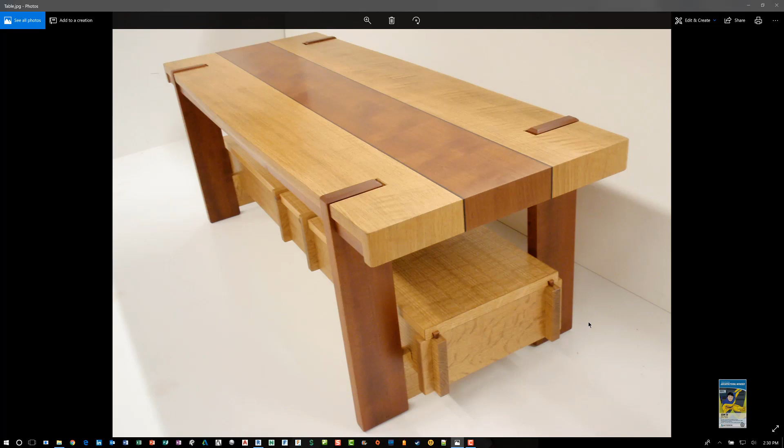Today's video is on how to create a dining table in Revit. I did a quick search on Google Images and found this table, and I thought it would be interesting to build this. This video is part of a series of videos that I'm creating on how to create Revit families. So let's go ahead and begin by creating this dining table.

Here I am in Revit 2018.2. I want to create a new family, so I'll click New over here. Choose Furniture, since it is a type of furniture, and you'll see the furniture.rft. Click Open, and the file will be created.

And when you work with this file, it'll give you two reference planes as a starting point. The two reference planes that you can see are called Center Left Right and Center Front and Back, and they both have Defines Origin checked, which means the insertion point of this table as it stands now is right here.

If we want to have the insertion point to be maybe, say, the lower left corner of the table, then we can adjust that accordingly.

As with all families, the first thing you want to do is take a look at the design of what you're working with and rationalize what you're about to build. For example, you have the top, you have the front, the back, the left, and the right. You need to create the skeleton framework that defines that tabletop. You also have four legs here that have a certain thickness and a certain depth and a certain height as well. So you need to create reference planes that define each one of those legs.

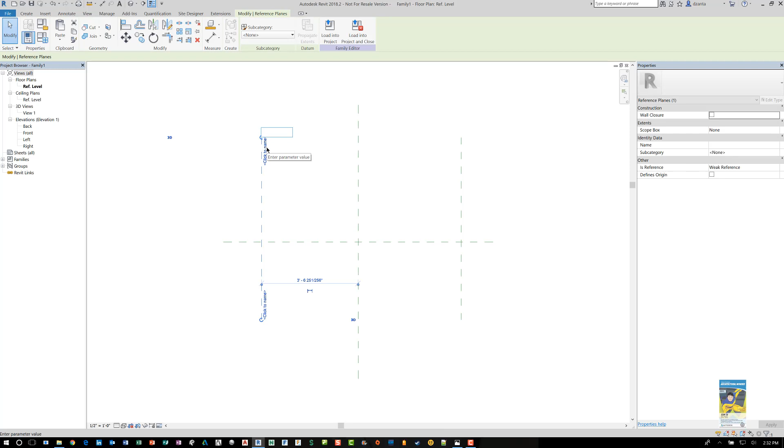I'll go here in Revit and I'll use the keyboard shortcut to create a reference plane. And I'll draw one on the left and I'll draw one on the right. When you're drawing the reference planes, try as much as you can to keep them aligned to each other and the start and end points to be the same so it looks cleaner for you. Don't forget to name your reference planes as well. So that's going to be the left side of the table. This will be the right side of the table.

Create a reference plane for the back. And create one for the front. And again, make sure that the reference planes line up nicely. This one will be the back. And this will be the front.

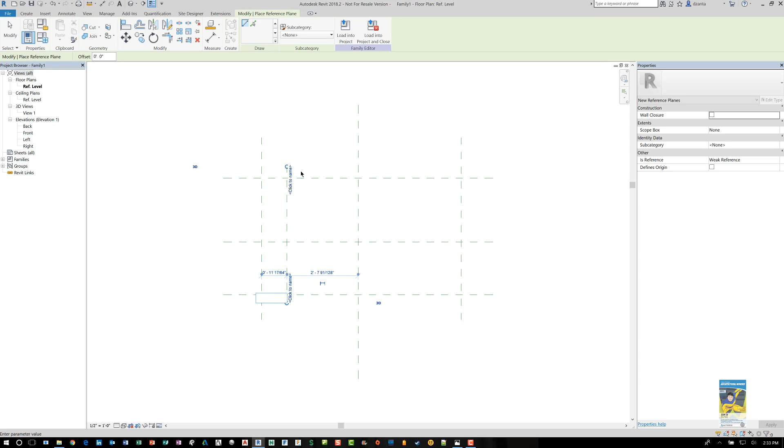We also want to create the reference planes for the legs in plan. So we need one roughly over here and roughly over here. And over here. And over here. We also need reference planes for the part of the leg that does this over here, and the one down here as well. And from the picture, it looks like the legs also come out past the end of the table, the edges of the table, like so. So let's make sure we create a reference plane for those as well.

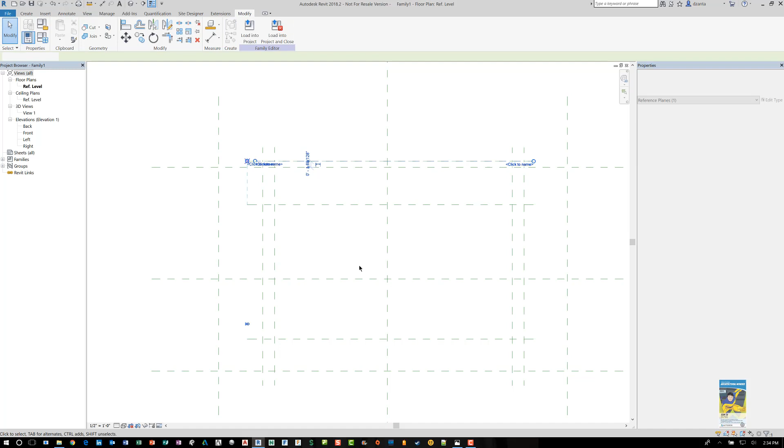Now, once that's done, we want to put some basic rules in place in this plan view. We'll create some dimensions that allow the table to grow equally on both ends. We'll define the length of the table and the width of the table, and the fact that it also grows equally from the center, since the center of the table is the center point.

And then I'm going to move this back over here a little bit. And we do know that we want to move these reference planes back a little bit. And for the legs, the extension that goes out past the edges is just a little bit. So I'll go ahead and place some dimensions for this side and this side. And let's set that to be an inch. And we'll hold that relationship, so we'll lock it. Same thing on this one.

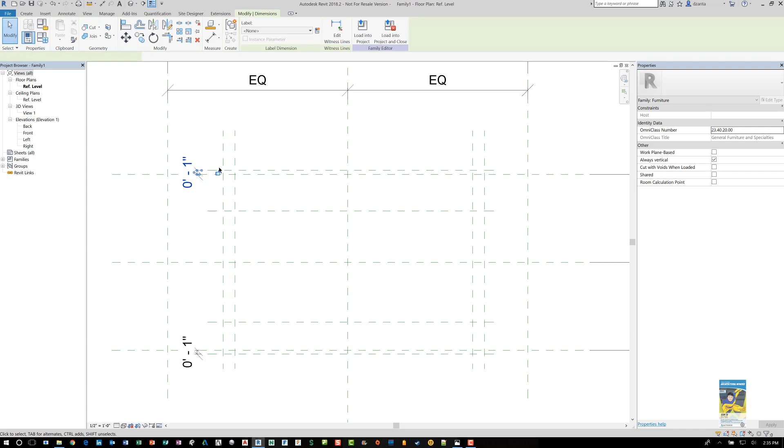Now as for the depth of the table leg, we can either parameterize that or make that a stable size. So let's, for the sake of ease, make it a stable size.

I'll put this over on this side, a little easier to see, and this one as well. Let's set it to be something logical, say 8 inches for now. And over here is 8 inches, so let's lock that relationship as well.

As for the thickness of the legs, they can be whatever thickness we want. Again, if we want to parameterize it, we can. Let's set that to 2 inches.

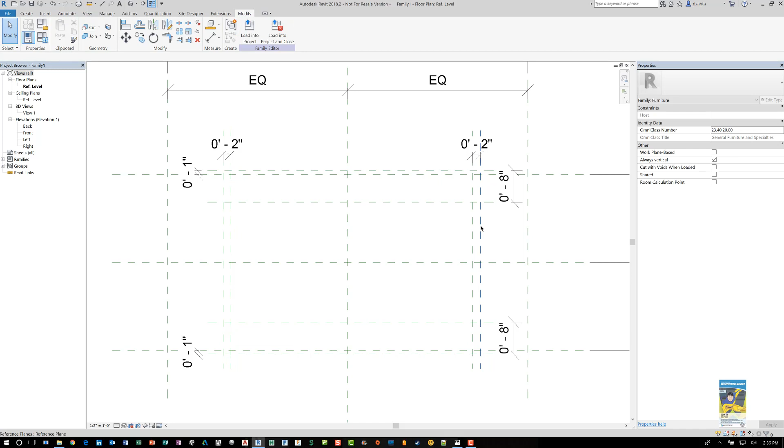Now, the location of the table legs from the outside edges also needs to be defined, because if you don't do that, as the table flexes, the legs won't stay in the same position. Right now it's set to a foot. I think that's fine, I'll lock that at a foot. I'll do the same thing on this one. Okay, so I'll lock that at a foot.

And we said we wanted the legs to be 2 inches, so 2 inches. Since we want to lock that 2 inch, that way it'll hold. Same thing over here, this needs to be locked as 2 inches. So when we draw the shape of the legs, here and here and here and here, it'll hold that size. So now let's go ahead and parameterize the table length.

And we'll do it as a type just for the sake of ease, and it's a family parameter, not a shared parameter. And the table width.

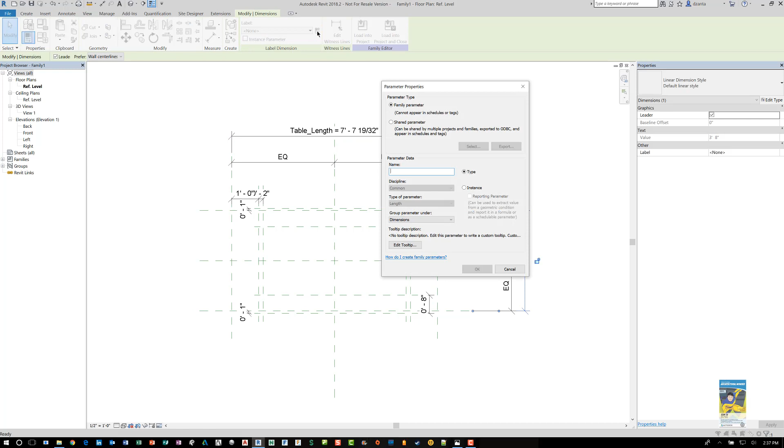Now let's head over to the front elevation, type in ZA for zoom all to fit, and take this level that they give us and pull it out of the way, because there is a reference plane at the bottom right there, and we'll call it bottom, and it's locked by default.

We need to create a reference plane that defines the tabletop. We also need to create reference planes that define the overall thickness of the table. And because there is some interesting void going on, I'll tackle that a little later.

So let's get the overall shape down. Now, we'll place a dimension for the total height of the table and parameterize that. And then create a dimension for the overall thickness.

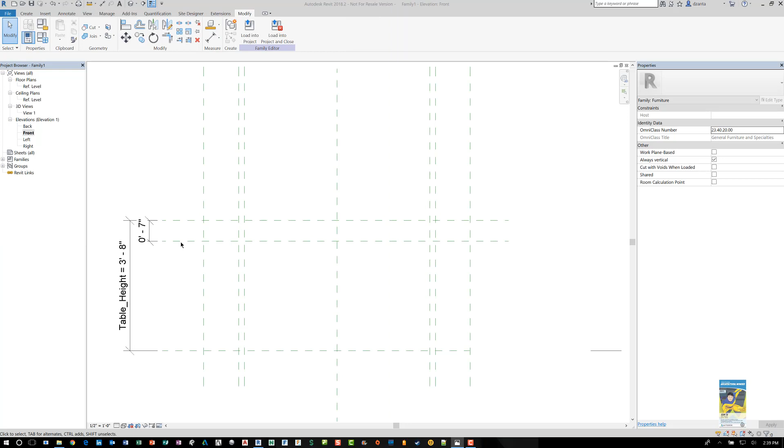As for the table length, we'll do a standard 8-foot table. And for the width, let's do a 4-foot table. Everything adjusts accordingly. Let's head back over to the plan view to make sure that it still looks okay.

You may need to change the scale as well so that all the text and dimensions are a little smaller, easier to work with. You may also need to left click and pull the reference planes so that they actually cross each other very nicely, to create the intersections you need so that you can actually create geometry.

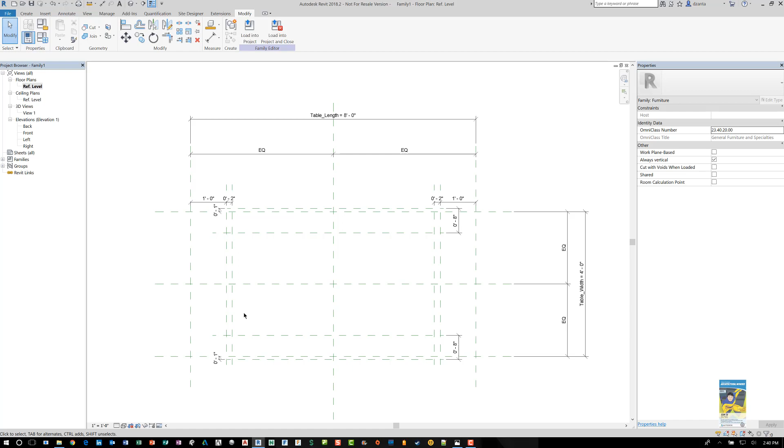So let's start by putting in some basic geometry. We know we have a tabletop. That tabletop goes from this intersection to this intersection as a rectangle.

So I'll head over to the extrusion command, use the rectangle shape, and unfortunately there's no lock feature here, which is what you see when you use a pick line method, where they have a lock feature. If they put that in the software, then when I use this rectangle command and click lock, all the lines I'm drawing will be locked by default to the reference planes I draw. Unfortunately, they don't have that feature with the rectangular shape command, so I have to manually lock them.

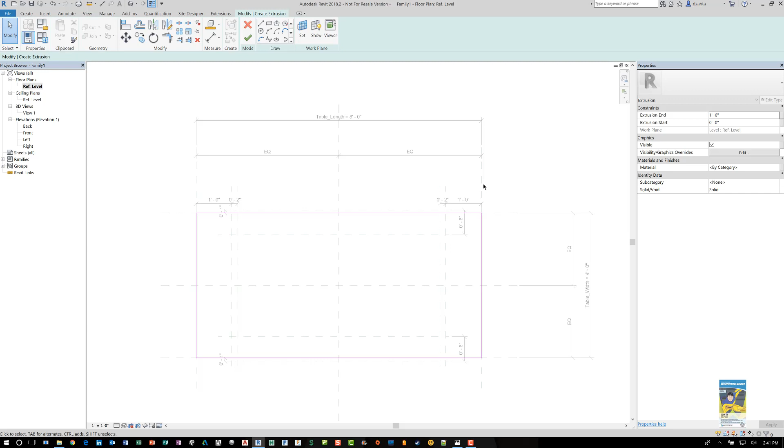Like this. So that edge of that magenta line is the edge of the table, and that aligns with that reference plane. Same here, here, and here. This is important because it's the relationship you need to build in order to tell the software that parametric dimensions control the location of these reference planes, which controls the plane of the geometry, which dictates the shape of the geometry.

We'll head over to the front elevation and finish the command, and you'll see the extrusion. I'll put it in shaded mode so you can see it, and we want to push and pull the top of the table to the plane that we need.

If you have to, you can also adjust your mouse sensitivity level if you have a good mouse, so it's easy to work with.

And so there's our tabletop. It's real basic right now. It's just a rectangular slab, and it looks like that.

table legs, there is some space just around the edges of the legs so that they go through. So let's go ahead and make some minor adjustments, and we'll create reference planes again. And this time I'm going to use the pick method, and I'm going to set it to what's a good size? Say 1/8 of an inch.

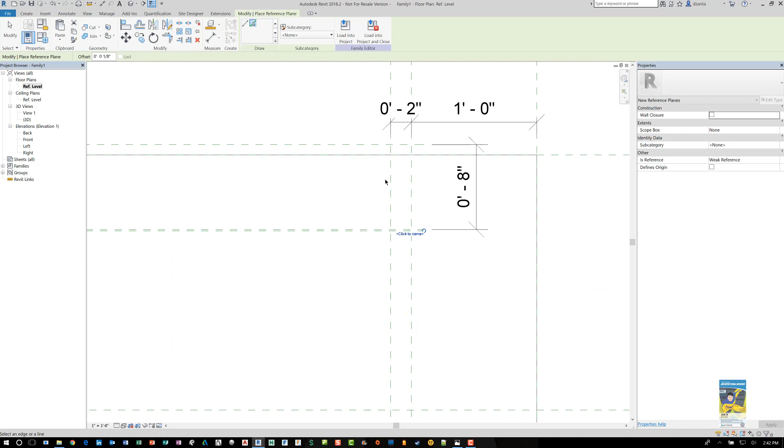Okay, so we'll create a reference plane on the outside of an 1/8, outside of an 1/8, outside of an 1/8, and then come over here and do the same thing. And then down here, same thing. So now you can see where you need to create the geometry.

So I'll head over to the Create tab again and do Extrusion again, Rectangle again, and I'll zoom in carefully. We want to pick this intersection here going to this intersection here. Whoops. So again, if you mess up, don't worry. You can use the Align command.

And that way it cleans up nicely. And to be sure, you can use the Align command to align and lock those faces as well.

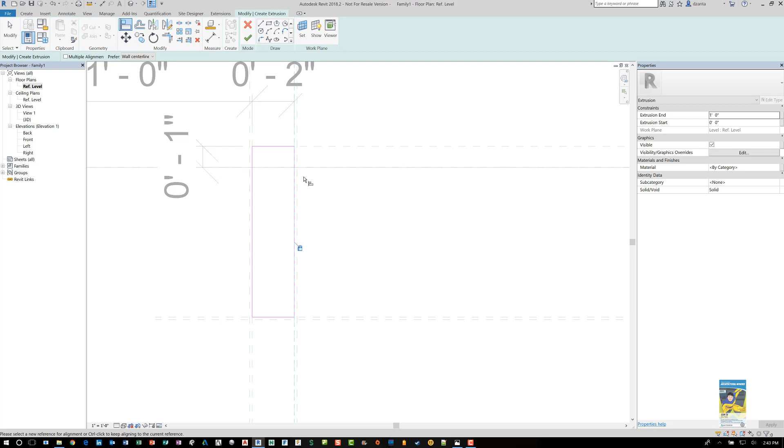And we'll do the same thing on all the other sides. You can use the mirror command if you want to in this situation to mirror that geometry. If you do so, you still have to align and lock.

So if I select it, I can use the mirror command with the pick axis and pick this, and it'll do so. And then grab these two and do this again and pick this one. And they're created, but you still have to go through and you still have to align and lock. So let's align and lock.

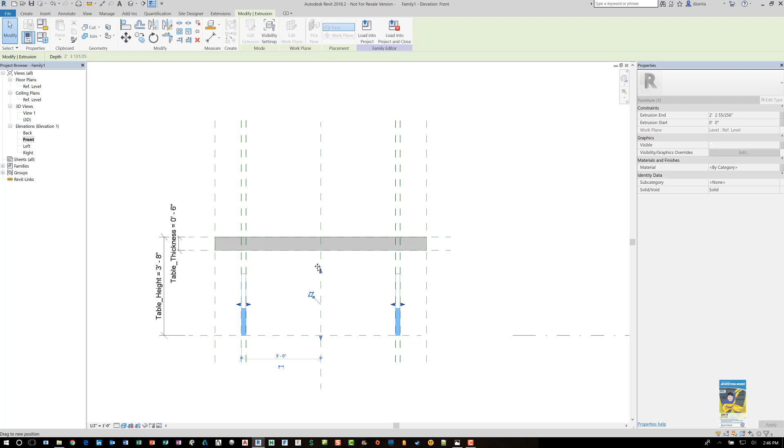So for now, let's pull this back up and get it to the height that we want. So if, let's say, we create a reference plane over here and dimension that reference plane, we can set it to 2 inches. That way we can select this extrusion and pull this down to that plane and lock it.

Again, we want to name our reference planes so that way we don't get confused with things, and later we can use them easier when we're doing certain commands like sweep and blend. So I'm going to put this as leg top reference plane.

This one is going to be tabletop RP, and this is going to be tabletop bottom RP. We already named this one, it should be right. And then these are the leg ones, which I'm not really too concerned about naming for now.

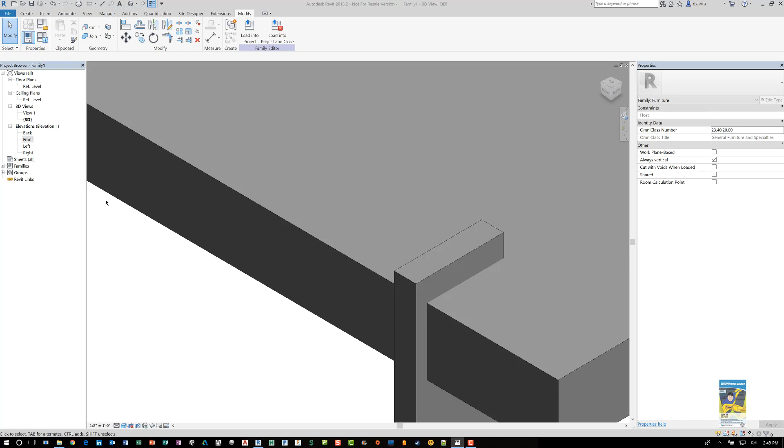How do we do this in Revit? How do we get it to have that kind of a gap? Probably there are 2 ways to approach it. We can either go back to the plan view and model this tabletop extrusion so that it accounts for that spacing, or we create a void extrusion and place it at those legs so that the void extrusions cut the tabletop. I'm going to select this extrusion and edit the extrusion.

And I'm going to use the planes that I already have. Since I created them earlier with a 1/8 inch gap, let's use that. And let's use the lock feature.

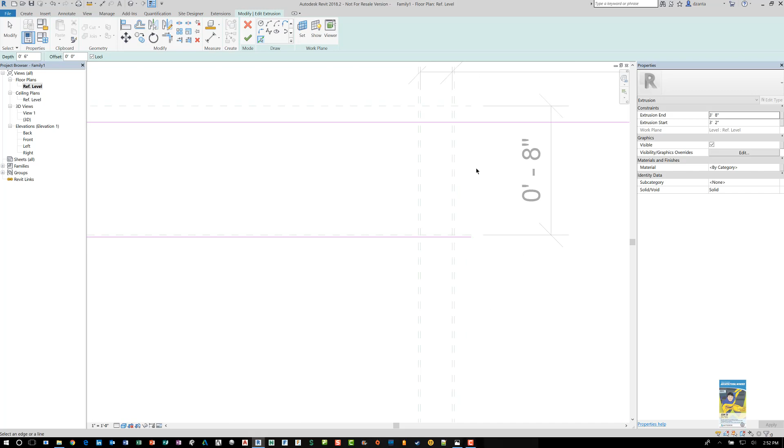So as you can see, the graphics card driver, because it's not seeing things properly, makes it very hard to snap to. So what I'm going to do is pause the video really quick and switch the graphics driver. Give me 1 second. All right, so I'm back, sorry about that. The NVIDIA graphics controller for adjusting the driver requires me to restart Revit. So for the sake of ease, I'm going to not worry about that and just continue building this one extrusion really quick, and we'll go on from there.

Okay, now let's do some cleaning up. That warning that you're getting, that's blinking and making noise in the lower right corner, basically is letting you know that you're creating the magenta lines on top of each other. So just be cognizant of that, so that when you're cleaning the lines up, they clean up properly.

If you mess up, it's okay. You know why? Because with Revit, when you do mess up like that, it will tell you. It'll actually highlight in orange, as you are seeing right now, the line work that's overlapping. So it's okay, just keep going.

You could, if you need to, use trim to corner and other commands that you have available to make it look nice and draw it quicker and easier. But I'm trying to be methodical when I'm building the families.

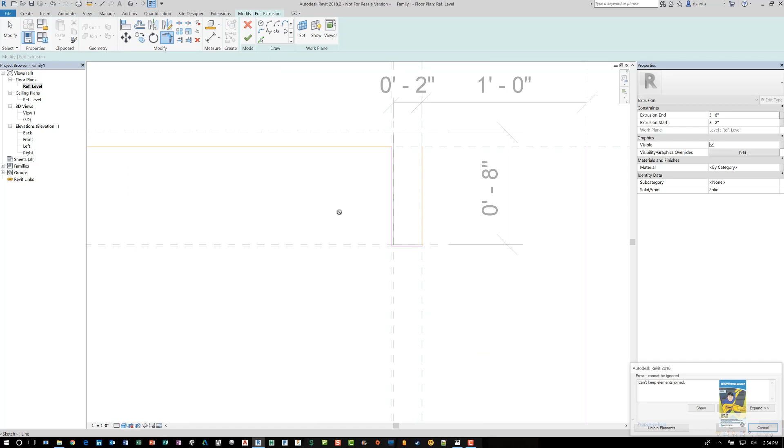And then we have this over here. Again, if you really want to, I can take this and mirror it across that axis. And then I can trim this back and unjoin that, then draw a line over here and clean this up.

Now that we have the openings accounted for with an 1/8 inch gap, if I finish it, it'll tell me if I have any overlapping lines, and I do. See, if you take a look over here, here's my warning, and there's my overlap over here. So I'll click continue, and then I will clean this up. Delete, and try again.

And there you go. So now let's look at this in 3D and see if we have the gap that we need, which we do.

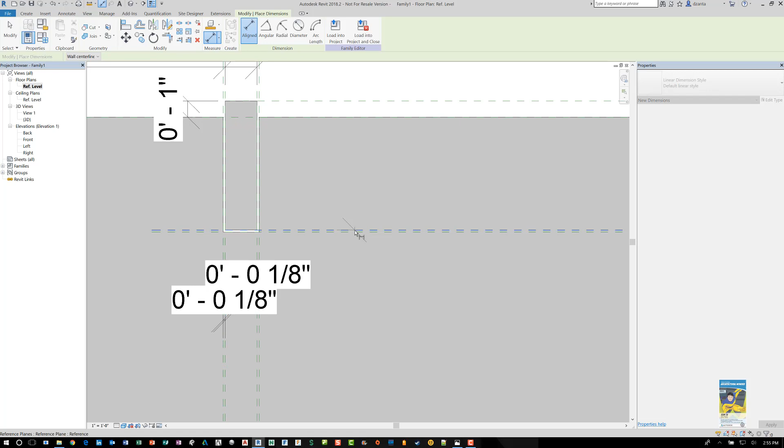Okay, now because of that gap situation, when we start to flex this table for width and length and everything, the 1/8 inch gap needs to be locked down, because if you don't, things are going to overlap and start to go crazy on you. So we place our dimension and lock those 1/8 inch dimensions, and then down here as well. So we should be okay if we flex it.

Now, as always, when you do a lot of work like this and you get to a good stopping point, save your work. So I'm going to save this as a family. I'll put it under my temp folder, under dining table, and we'll just call it dining table.

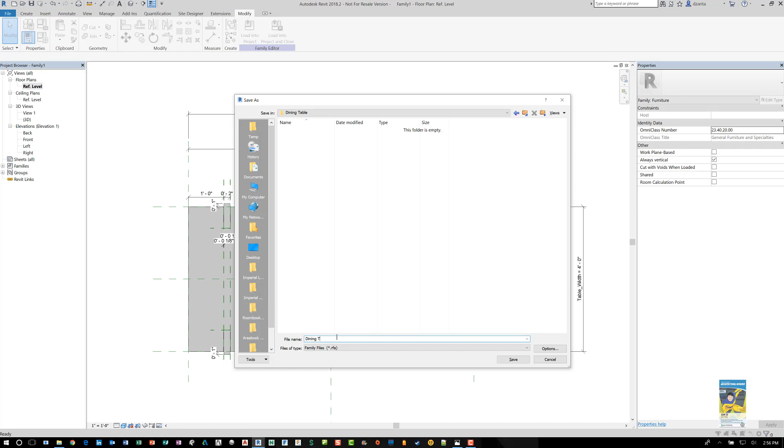Now that we've done this, we need to flex the table to make sure that everything adjusts properly. So if I go into the family types window and make some size adjustments, let's say it's 3 feet by 7, make the table height say 4 feet high, and the thickness say 1 foot. Does everything flex accordingly? And it looks like it does in plan view.

How does it look in front elevation view? It does look like it's holding there. It does look like it's holding there. And I didn't get any warnings whatsoever. So it looks like we're okay there.

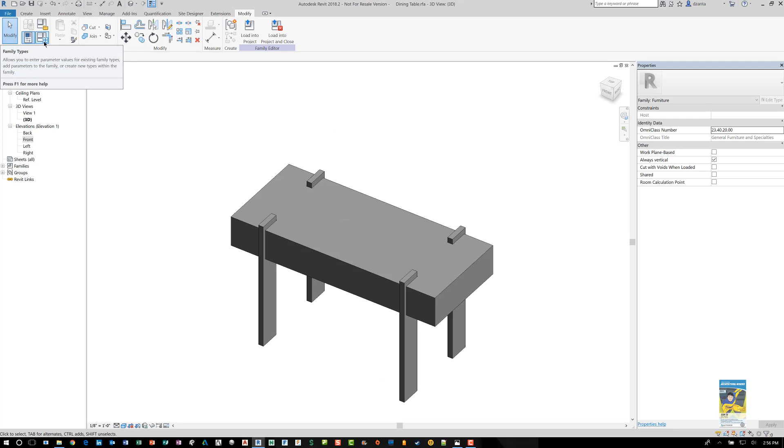So from the picture, let's go ahead and make some size adjustments. Let's make the table thickness not that thick, let's do 8 inches at most. And we'll set this to a 4-foot table and say 10.

There we go, so we have the basic one down. Now, what about from the picture? It looks like we have this slat over here and this slat over here that joins this table leg and the other one, and this one and this one. So we need that as well.

Let's head over to either front elevation or left or right elevation. It doesn't really matter. We'll create reference planes that define the bottom of the slats that go across and the top of the slats that go across. And from the picture, the slats are kind of low, so I will place a dimension from here to here.

And we'll make that slat base at, say, 3 inches from off the ground. And we'll make the slat 8 inches, and we'll make it a uniform thickness so we won't have to flex it. There's no need to, you can if you want to, but I'll just keep it like that.

So if I head over to, say, the left elevation and shade it, we can see the area that we need to work with. And so that needs to go across to here, down to here, over here, and back up. So it's just an extrusion.

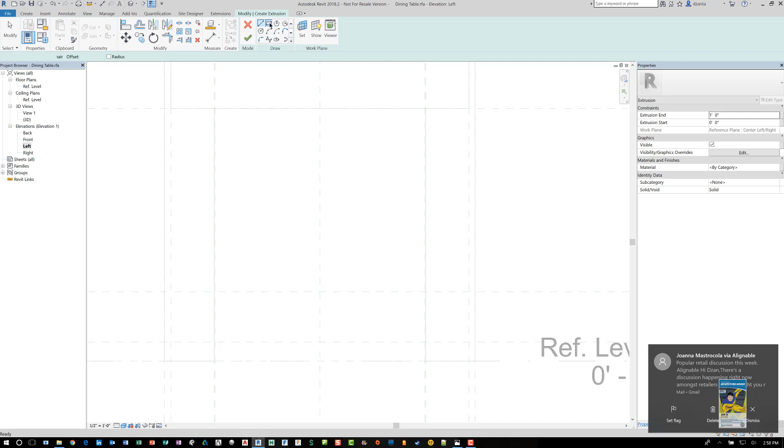So click Create Again, Rectangular. We'll zoom in here. And we will click here to here.

And then let's verify that we align and lock the planes that we need. Now, when you are aligning and locking, make sure you align to the reference planes, because if you're aligning to the geometry, you might get some weird hiccups and issues. So try to make sure you're aligning to the reference planes. That's a lot safer, and it's a lot more structurally sound.

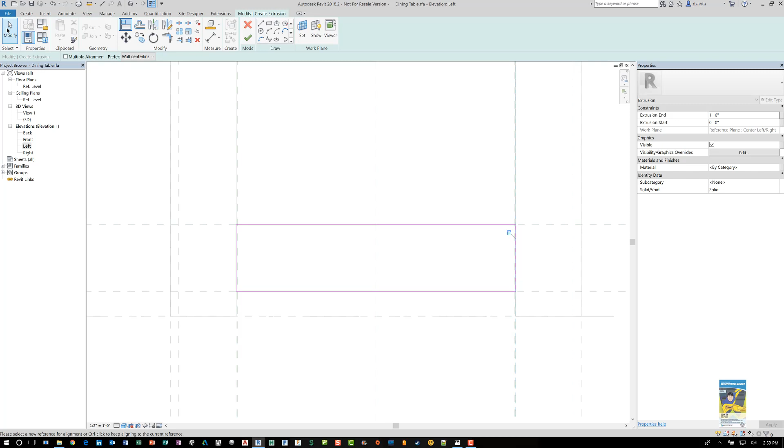Like so. And if I head over to, say, the front elevation, and I finish this one, it's right there. We'll go ahead and pull it to where we need, which is right.

I'm going to zoom in a little bit, because we have a couple of reference planes that are really close together. So let's go ahead and put it exactly where we need, which is there, and lock it, and this one as well, and lock it.

Now if we look at this in 3D, we can see that one leg. Let's head over to the plan view, and we can right click and say select previous, and it'll get selected. And we can use the mirror command to mirror it to the other side.

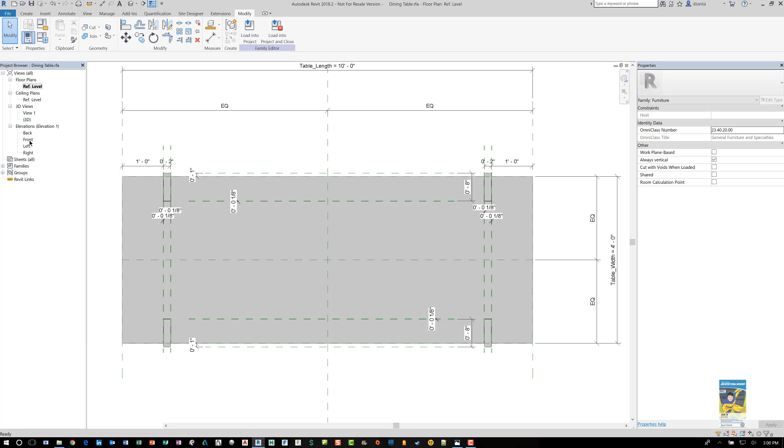Then head over to the front elevation again, and we can see if we switch this to wireframe that it's over here. It's a little hard to see, but it is there.

So what I'll do is I'll go to the right side elevation and do zoom all extents, and you can see that that's that geometry right there. We'll go ahead and align and lock, because we need to make sure that that geometry is locked, otherwise it won't work, it'll mess up on you.

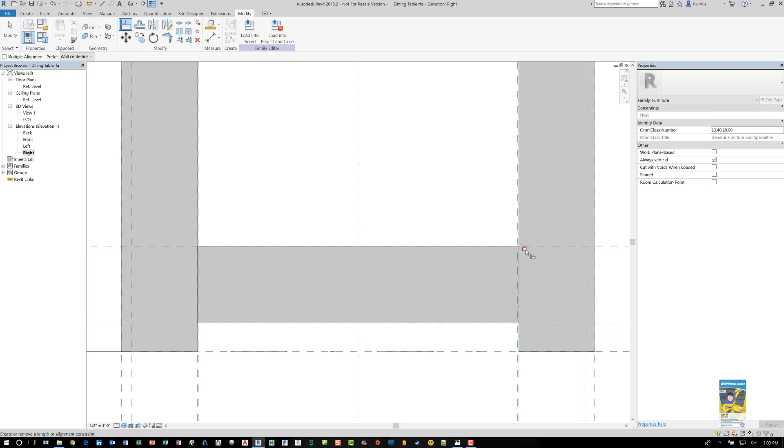And so now that we've done what we wanted to do, we head over to 3D view and take a look, and it looks okay. Again, save your work and flex it to make sure it does what it needs to do.

So in order for us to flex it so it works properly, and it really kind of tests the shape of this, go ahead and we'll set the width to, say, 3 feet, something simple, and it adjusts. And the length as well, you could if you need to. So that it, see? There you go.

So we can see that we didn't finish aligning and locking. So let's head back over to the left or the right plane, or the front or back, and make the adjustment. See? So we missed a couple of alignments. This is why we flex.

Okay, so remember, align and lock to the correct reference planes and the right faces that need to move. And again, look in 3D, should be okay there. Let's flex again. Let's make this 10 and make this, say, 3.5.

And it looks okay, so let's set this to 4 because I kind of like the proportions on a 4x10.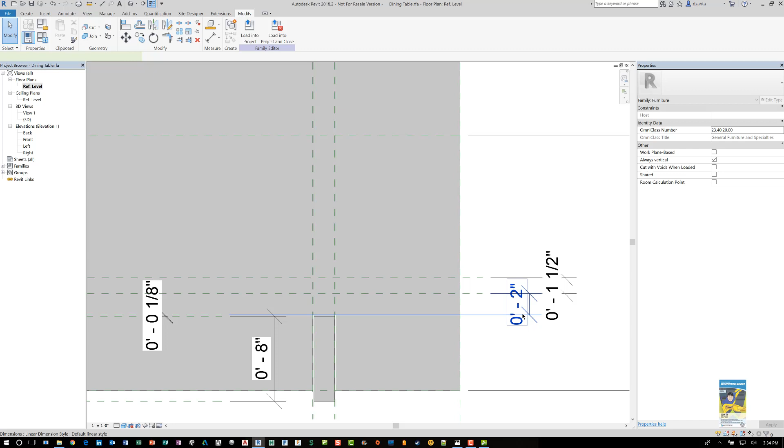And the slats themselves look like they're not that thick, maybe 1.5 inches. So let's set this to 1.5 inches, and we'll lock the 2-inch dimension so that it will always stay.

And the table needs these horizontal slats to stay that thickness as well, so we just need to do the same thing.

Also, earlier I said make sure you're drawing your reference planes so they are nice and lined up. When you work with them and see how they flex, you may need to adjust and pull them out further. For example here, we may need to pull these out, and it helps with drawing them nicely and controlling the start and end points of those planes.

And that way, when you're dimensioning content, it's easier. So for example, dimensioning from here to here, and then from here to here as well.

Also, when you place the dimensions, you'll notice that if I'm zoomed in, this dimension doesn't really align and lock itself to the other ones, because it doesn't see them in the view you're looking at. So if you zoom out a little bit so it can see the other dimensions, it will go ahead and place them exactly the way you want.

So again, let's set that to 2 inches, and we'll set this one to 1.5 inches. And we'll lock these dimensions so they stay that size and position.

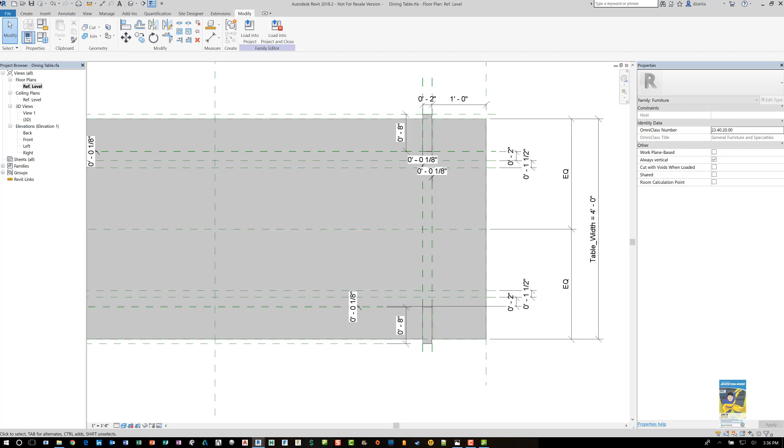In regards to the left and right edges, this edge and the other side, they look like they line up either just below this table or along with it. I'm going to assume it's inside, so the face of this edge and the face of this edge is closer to the leg than to the face of the tabletop on the right side of the table.

So if that's the case, we want to create a reference plane over here that defines that stopping distance. Let's dimension this from here to here, and set it to some dimension that's logical. Let's set it to 4 inches, that's fine, and we'll lock this dimension as well.

And we'll do the same thing on the other side, it needs to be 4 inches as well. So again, set that to 4 inches, and then lock that dimension.

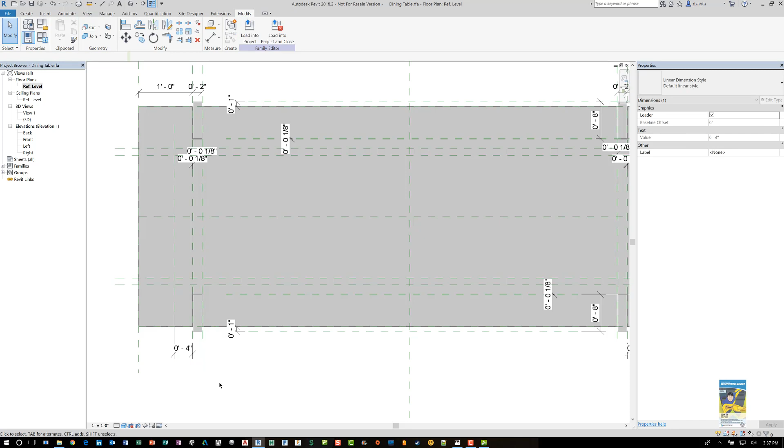So now we have that set up the way we want. Let's go ahead and draw the two horizontal slats. We can either draw them from top down or from left or right and extrude in the opposite directions. In this situation it doesn't really matter which way we do it, because when we flex it, it'll be okay. When we do the dovetail, however, we do want to do the profile from the left or right side, so for the sake of ease, let's just go to the left side.

From the picture, it looks like the vertical and horizontal slats are sitting such that the vertical ones go into the horizontal ones by about 2 or 3 inches. So we need to put reference planes for those position heights as well.

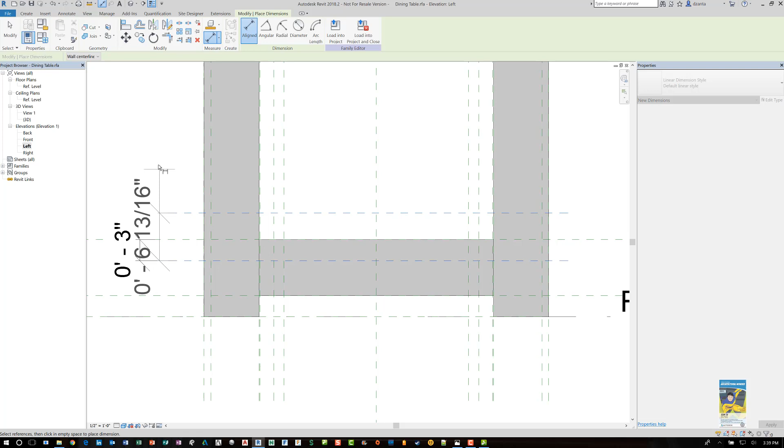Since I'm here, I can create a reference plane that defines the top of the slat going into the horizontal ones. We need to define that distance, and we can lock it at 3 inches. Then the size of the slats themselves could be whatever we want—from the picture, I'm going to set it to 8 inches. So you can see roughly this is where it's going to be, this one and this one.

Let's go ahead and draw those extrusions. Again, rectangle, from here to here. And lock those faces. Same thing with this one.

Now, when we drew the table earlier—the tabletop and the legs—we put in a 1/8 inch space gapping because it looked like it had it from the picture. But these look like they go nice and tight inside, so I'm not going to worry about that.

Let's finish this, head over to the front view, and look at what we have drawn. We need to push and pull the face to the plane that we need, which is this one, and lock it. Same thing with this side. If we look at this in 3D, it should give us what we want.

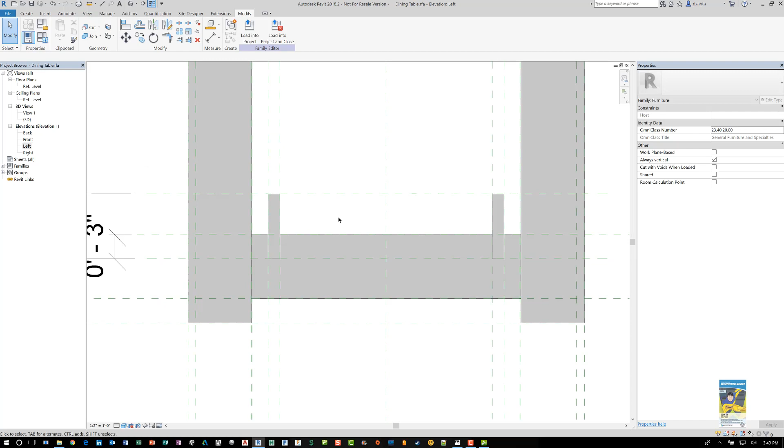There we go. Now let's do the dovetails since we're along the same kind of relationship thinking. Let's head over to the front elevation—or sorry, left elevation is better. We want to draw that dovetail up here because we're going to put a horizontal slat above that.

Let's draw a reference plane that defines the height of the dovetail, which is around here. We'll dimension that. If you have to, you can set the scale to adjust it so things are a little smaller. Let's set this to, from the picture, say 1 inch. Okay, maybe not 1 inch—let's do 1/2 inch, make it a smaller dovetail.

We need to create a reference plane off the middle of there so that we can create a reference plane that is 0.25 inches on either side, like so. And the dovetail goes into—let's set this to 1/16 of an inch.

We'll zoom in a little bit and pull in here and here. So our dovetail is going to go from this intersection to this one, to this one, to this one, and back. Technically, the dovetail should go into the wood.

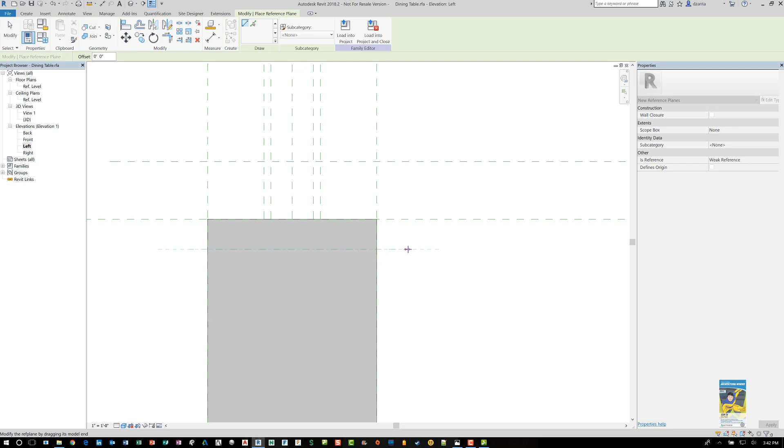So if I create a reference plane down here and dimension that as well, we can force that to be—okay, 1/4 inch is fine. Now we know that if I pull that reference plane down like this, and this one here as well, we can draw it.

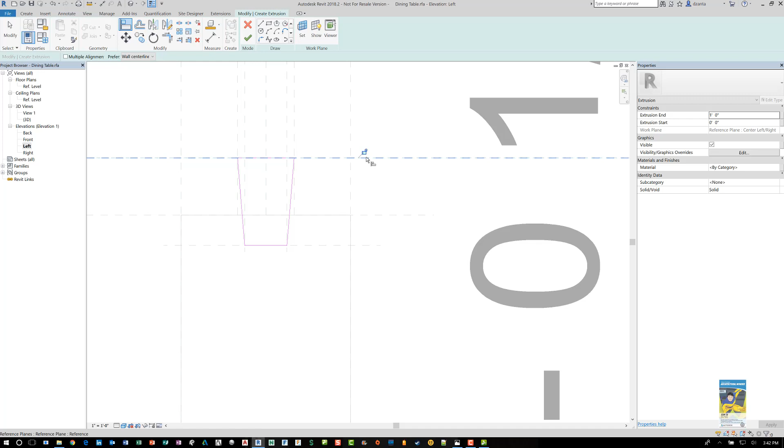Let's head over to the Create tab, go to the Extrusion command. In this case, we'll draw the Line command, going from that corner to that intersection, to that end intersection, to that one, and that one. Then we use the Align command to align and lock the faces that we know we can align and lock, like those two. We'll finish it, then head over to the front elevation and see that we have that.

So let's again pull that out. And you know what? If we look at the picture, it looks like the dovetail is stopping short of the outside edge of the horizontal slats.

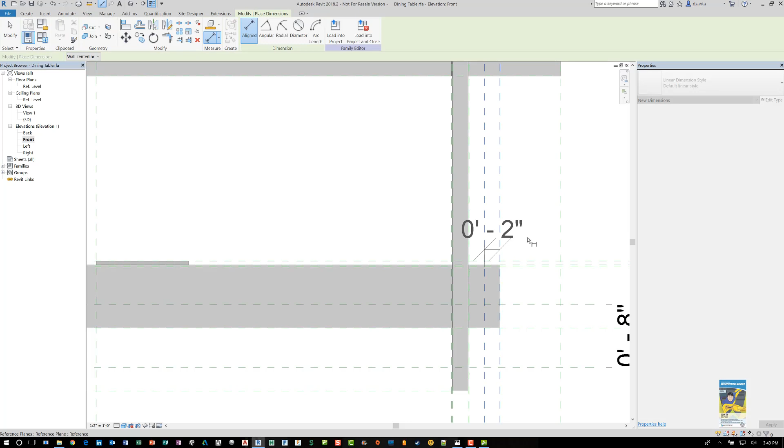So let's zoom in over here, and we will create a reference plane that is, say, 2 inches from the outside edge inward, like that. We'll dimension this and lock it at 2 inches. Then we can take this and pull it over here to hit that plane and lock it. Same thing on the other side.

Create a reference plane using the pick method, the 2-inch offset over here. Create a dimension, place it so it's lined up with the other one, and lock it. Zoom in, select our dovetail extrusion, and push and pull that edge so that it touches that plane and lock it. Oops, missed it—so again, just zoom in a little bit.

And if we look at this in 3D, we should see it. And it looks like that. So we need to do the same thing on the other side. The fastest way, for the sake of the video, is to switch this to wireframe.

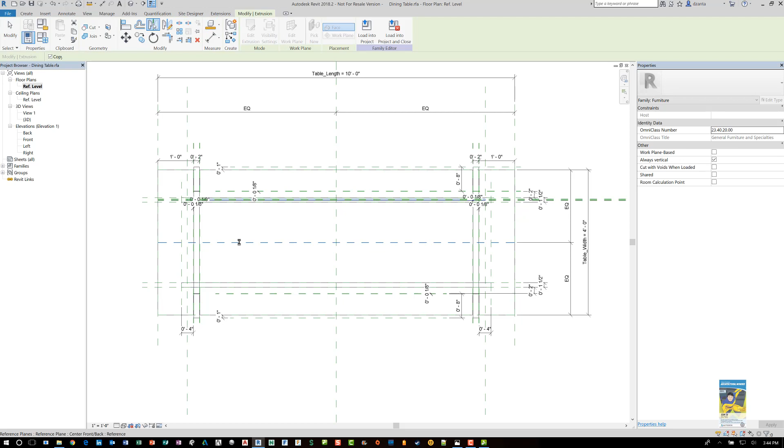And I'm going to grab all of this right here, and I'm going to mirror it right here off of that. And then, because we've mirrored it, we need to align and lock that edge, and align and lock this edge.

Now we'll switch this to shaded. We'll do zoom all, look at the 3D view, zoom all, and make sure it looks the way we want it to look. Good. Now we've done a lot of work again, so don't forget, save your work.

Now once we have it saved, we need to flex it again, just to make sure everything's okay and we haven't messed up on any alignment and locking. So let's make this 8 feet and make it 3 feet.

So we have, because we mirrored it, we didn't align and lock over here. So we need to head back to the left elevation and make sure that's aligned and locked as well. Because you can see that we have the shape right there and it's not placed over here.

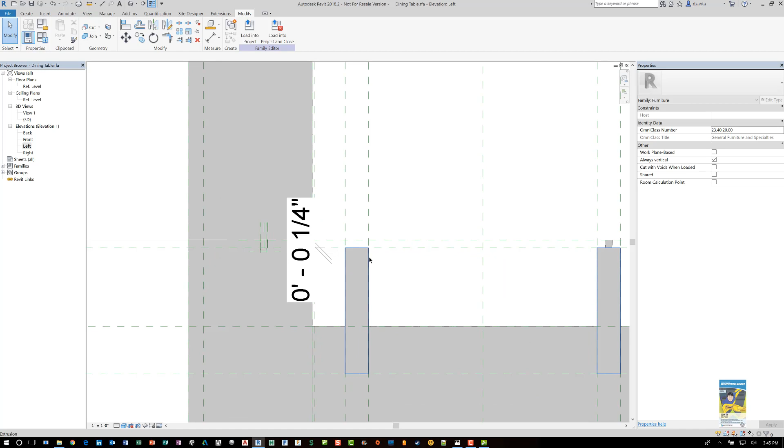So we'll create a reference plane right here from the... this one is aligned and locked. We'll set that one as well. Let's take this and do this, and then we'll move this so that it's placed there.

Now, how do we make sure that it's aligned and locked properly? One of the things we can do is we can create a reference plane from the midpoint of that object up like this. Take that reference plane and pull it down a little bit so it goes through.

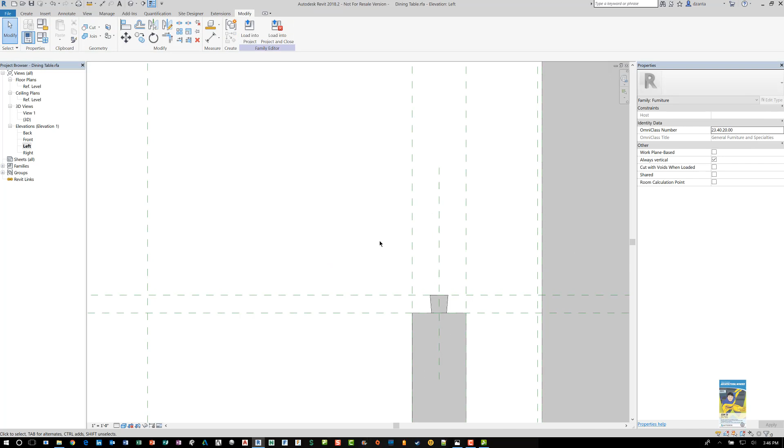And then we can align, we can dimension this to this to this and equal, and it will stay. Same thing here, dimension this to this to this, zoom out here, place it, and hit equal.

Now let's try one more time. Let's change this from 3 feet to 4 feet and see if it adjusts. No, it still didn't adjust, which means we didn't align and lock something.

Let's go ahead and take, for the sake of ease, let's do this. We will move this over again, place it there, and then see if we can align.

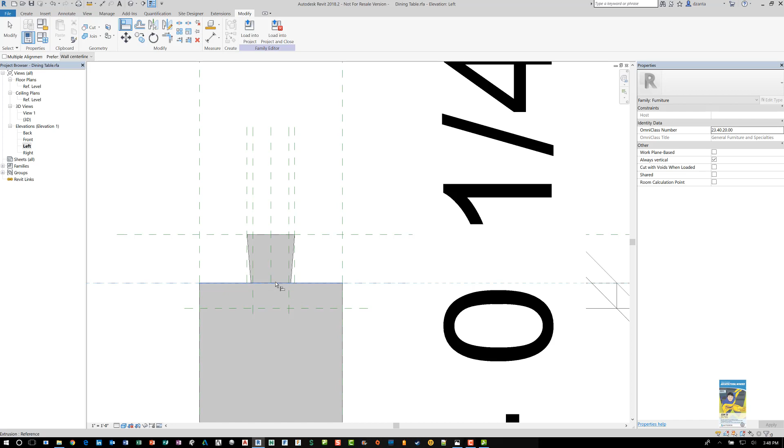Okay, now let's see if it stays. So this is the importance, obviously, of flexing the model to make sure everything fits properly and everything moves properly. So it seems like we're having hiccups with this one, so I'm going to just delete it.

And I'm going to go over here and draw it manually again. So let's draw that plane, pull that one down a little bit. And we said earlier that this is a quarter of an inch. Okay.

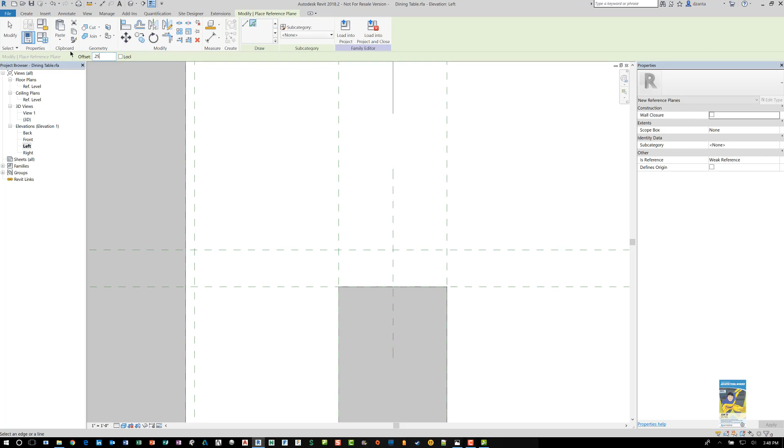So create a reference plane, pick method, quarter of an inch. One here, and the other one was, I think, an eighth of an inch. So we look at this object here.

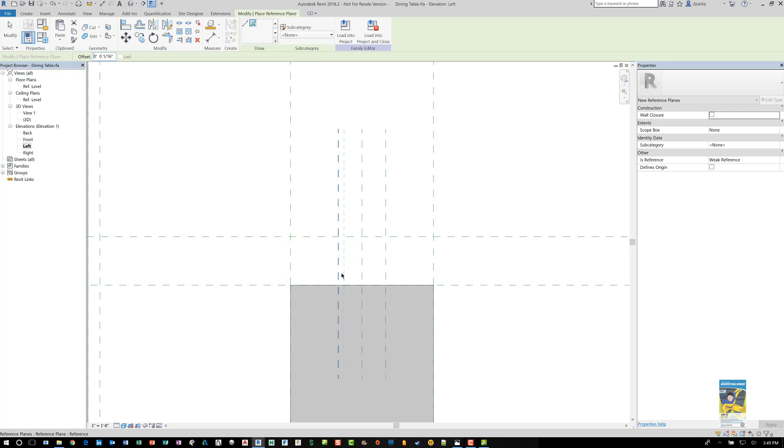Pick method. I think it was a sixteenth of an inch. Come in at a sixteenth of an inch. Yep, that's it. And then the base of it, we drew it at a quarter of an inch.

And then we will align and lock. That one's already aligned and locked. Good. Okay, so then we draw this again.

Create extrusion. We do the pick method with a lock. Pick this one. Pick this one. Then use the line method and draw from here to here. And then from here to here, again, trimming the corners.

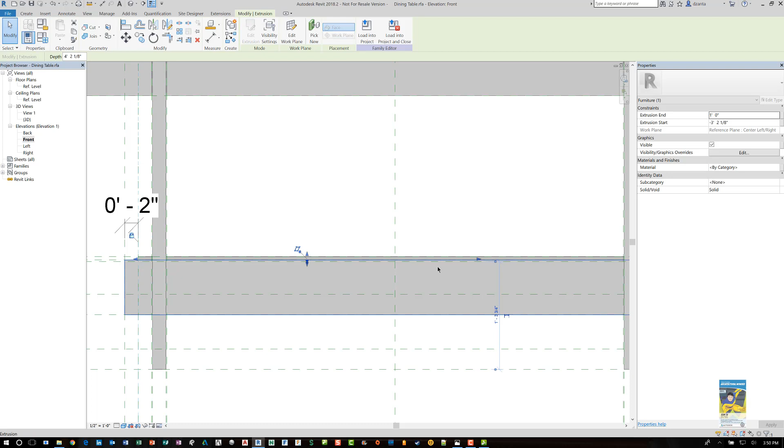And then we'll finish it, and we'll head over to the front elevation. And you'll see that it is selected, so let's push and pull it, and lock it. Same thing over here. Push and pull this, and lock it.

Now let's look at this in 3D to make sure it looks the way we want, which looks good. Save the work, and again, flex it.

So we've got one that doesn't want to... let's go to the left elevation again, that doesn't want to align and lock and stay put. This one does.

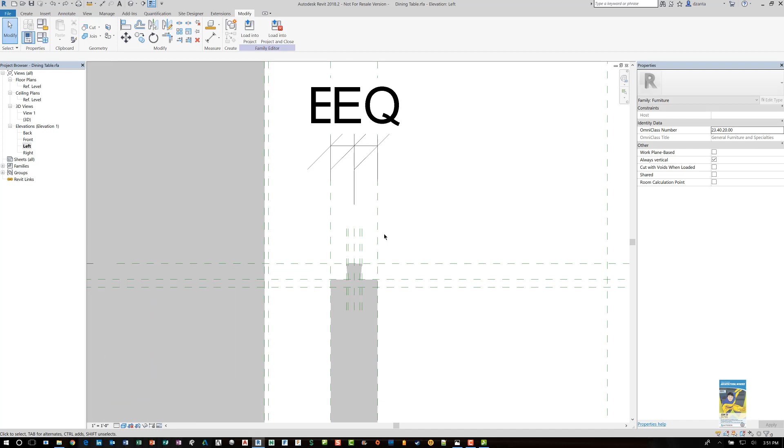So what we'll do is we won't flex it so I can get back the dimension that I want. I'm going to delete this, and then put in that equality dimension again, from here to here to here, and lock it. Now let's see if it flexes. Ah, still doesn't. Okay, so then we'll force lock it.

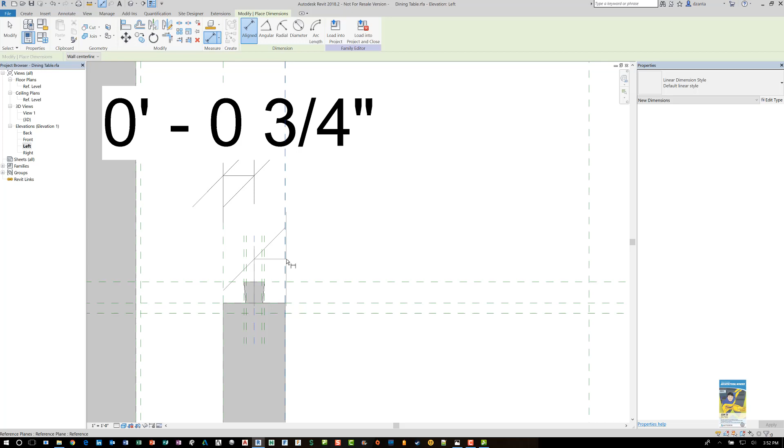I'm going to delete that equality, and we will dimension this to this, lock it, and then this one to this one, and lock it. Oh, it'll over-constrain it. Okay, so let's see what's going on here.

So what I ended up doing was deleting everything, recreating it, recreating the equality conditions, and then flexing. So now it looks like it's flexing properly.

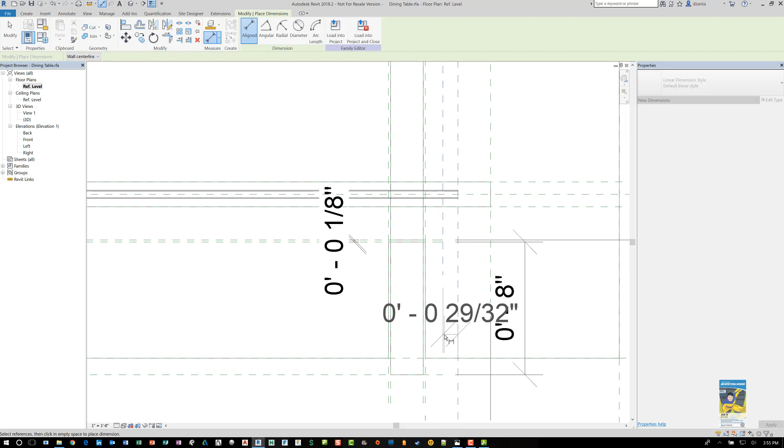So let's head back over to the plan view, and let's put in the reference planes that define that. Let's switch this to wireframe so we can see our dovetails. We want to create a reference plane over here, just shy of the dovetail, like that. And we'll dimension this from here to here, and we'll put this in at 1/8 inch, and lock that dimension so we know it holds.

Same thing with the other side. Create a reference plane over here. Dimension this as well, and lock that as well. So we know that horizontal slat is going to go from here.

And it's going to go, let's see, just outside this one. So we'll create another reference plane over here of 1 inch, like that, and on this side over here, like that. And we will dimension this as well, and we'll lock this and this one as well. And lock it. So now we have the parameters for that table.

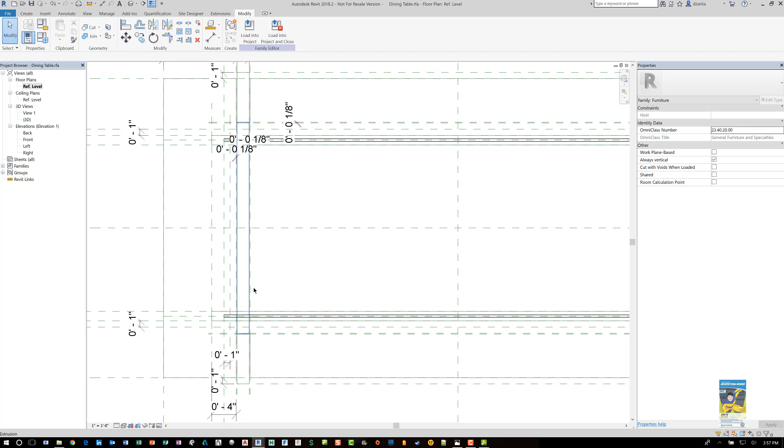Because we have the dovetail, we don't want to necessarily create a profile that's flat in elevation and have the thickness go down. We really want to go from the left or the right side, because we need to also define - so now we have the definition of the edge here. We know that that slat goes to here and it goes above the dovetail, so we need another reference plane that's say 1 inch thick above, like that.

So I'm going to pull this one out here so I have an intersection to work with. And I'm going to dimension this one as well and lock that as 1 inch. And on this side, I need to pull this all the way out too, so I can see very carefully that we are going to draw a horizontal profile this way with the dovetail in mind. And it's going to extrude towards my face or away from the screen, towards the screen.

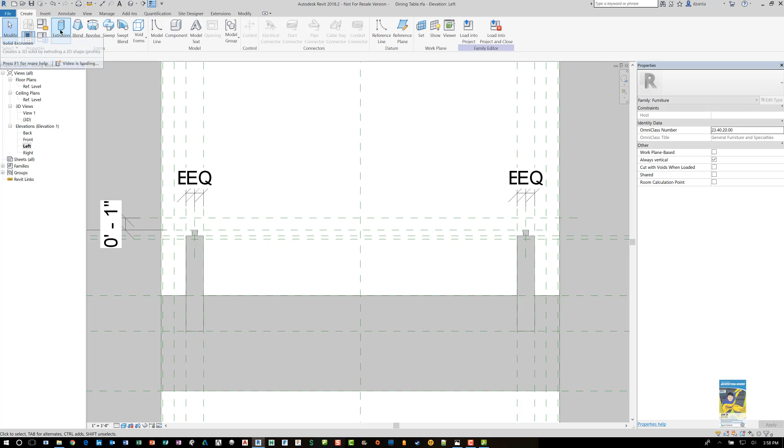Create an extrusion. We'll use the pick line method with a lock. We know we want the top. We know we have the left and the right. And the bottom is going to be this one. Oh, let's zoom in a little bit. It is this one. And because we have the dovetails, we need to pick the dovetails, and over here.

And then we can use trim to corner to clean it up. Now over here, if I do trim to corner, I'm going to have the same kind of little hiccups that we did last time with lines overlapping and then have to redraw. You can use split element and use delete inner segment, and then just be very careful with what you're picking.

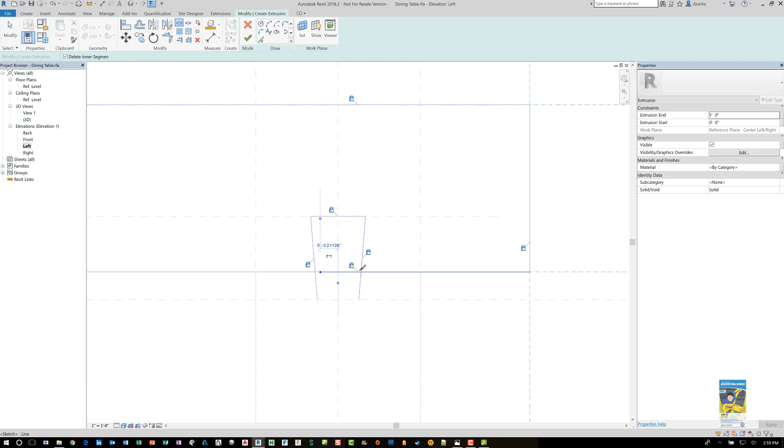So because my mouse sensitivity is off, I'm going to do it this way, and then I can trim cleanly like this. And same thing with the other one. So I'll say split element, delete inner segment, pick the horizontals, trim the corner.

So that's the profile shape. We'll finish it, it gets extruded. We'll go to the front elevation, and you can see it gets pulled like that.

So again, where is the edge of this horizontal slat? It's going to go all the way over here to this plane that we drew earlier, and we're going to lock it. Oops, I missed. Again, zoom in if you have to. And lock.

And we want it to zoom in over here, that edge. Lock it. Okay, let's look at this in 3D again.

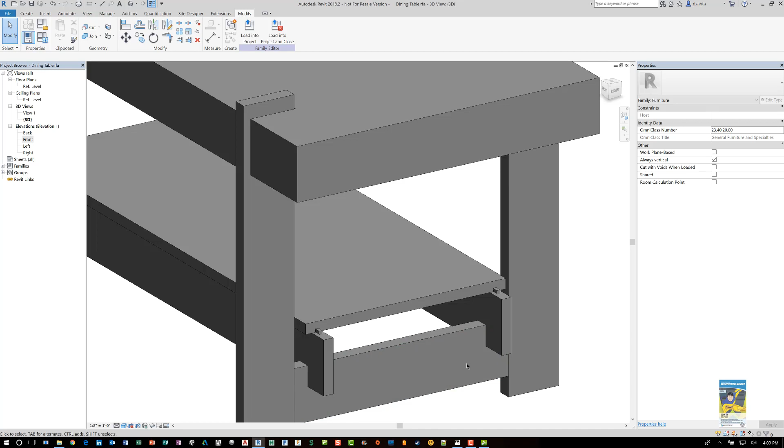So there we go, that's our slat at the bottom. We can repeat, obviously, the horizontal members that go across here for these 4. So for the sake of speed, I'm just going to do the skeleton framework for where they sit, and then I'll do 1, and then I'll pause the video and time lapse forward so that it does all 4, and we'll continue from there, so you don't have to wait on me making all 4.

So now we have the horizontal slats that I've drawn, 1, 2, 3, and the 4th one, which is over here. I've drawn them in with the reference planes and everything. And from the picture, it looks like the center ones go above the horizontal slat right here, that platform. And if we look at the picture, we can see that it goes above here and above here. It sticks out here as well.

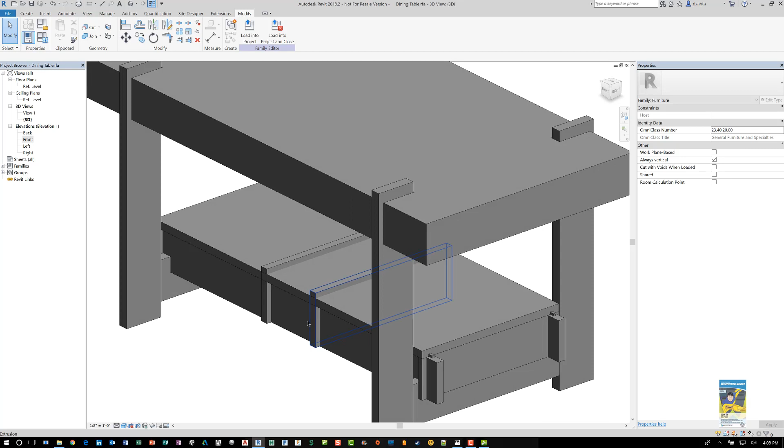Looking at the model, it does look like what it's doing is fine. Now, if I switch this to hidden line, you're going to see that this is a single slat right here, and these need to go through that slat. If I were to use join geometry to join this to this, I get this kind of situation. I don't want that. Okay, so I'm going to undo that.

What we end up having to do is we need to take this particular extrusion and pull this edge over so it ends here, and then copy that slat to here and copy it to here and push and pull as well. So let's head over to a plan view and let's make that adjustment.

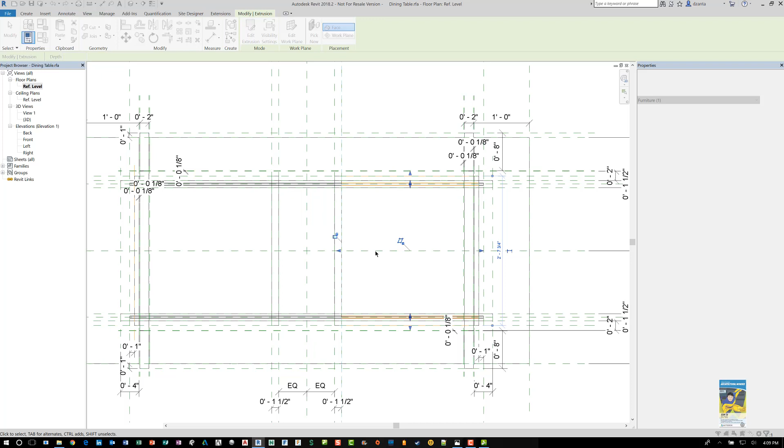So I'm going to take this, pull this across, and let it die right there. And I know it says I need to remove the previous constraint so that I can hold it to this one. And then I can take that slat that you see, now that if I do shaded, you can see that there's that piece.

We go to the front elevation. We still have it selected. I can just mirror it to this side. And once I've done that, what I need to do is push and pull so that the edges are aligning and locking to what I want.

So here's 1. Here's 2. Over here, 3. And this last one, 4.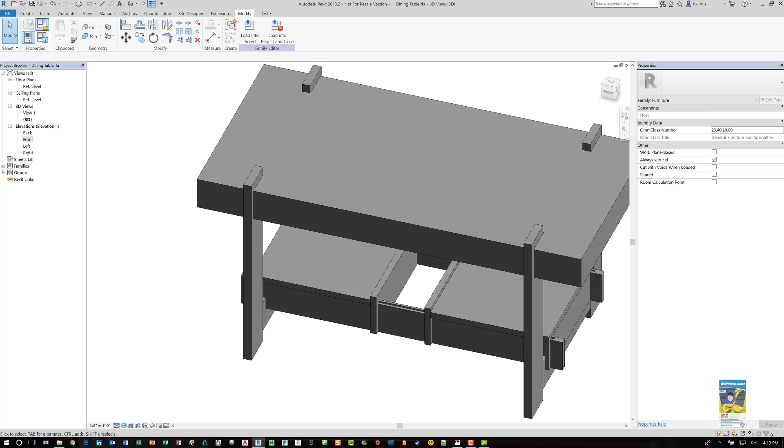Now, this may get a little tricky because if we switch this to wireframe, we can see that we push and pull at hopefully those different edges. These are the areas that we saw in the front elevation that might cause some conflicts. So for now, let's hold this the way it is and leave that opening.

Save the work and flex it to see if what we've done so far is good. So head over to here, switch this to say 3 feet and maybe 10 feet, and hit apply, and it adjusts, and it doesn't look like it's breaking. So let's set it to the shape that we originally like and want.

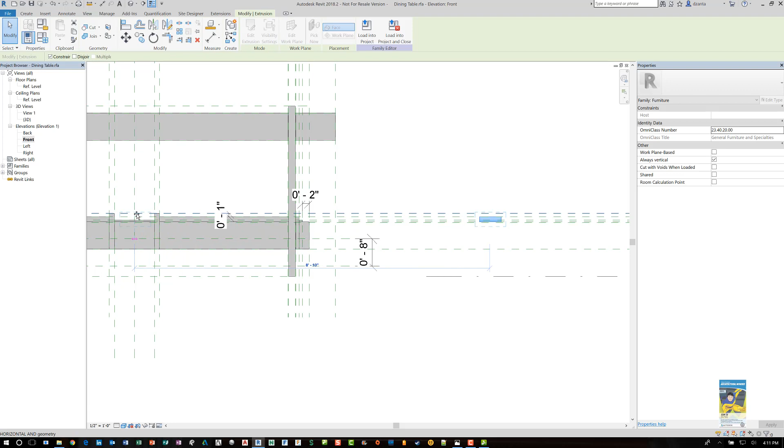And then we can head over to the front elevation. And we can take this one that we created here and we can copy it, just horizontally this way. And then we can push and pull this edge in so that it's really, really narrow. And then we can move it back over to here. And the reason I do this is so that it's easy for me to push and pull the edges now and lock the edges that I need.

There we go. So looking at this in 3D, it looks like we're good. We're finished. Now the only thing left to do is really to add some material to it.

So to do that, we can select the legs, head over to the materials under properties, and just click inside here and add a new one. We'll call it vertical leg material.

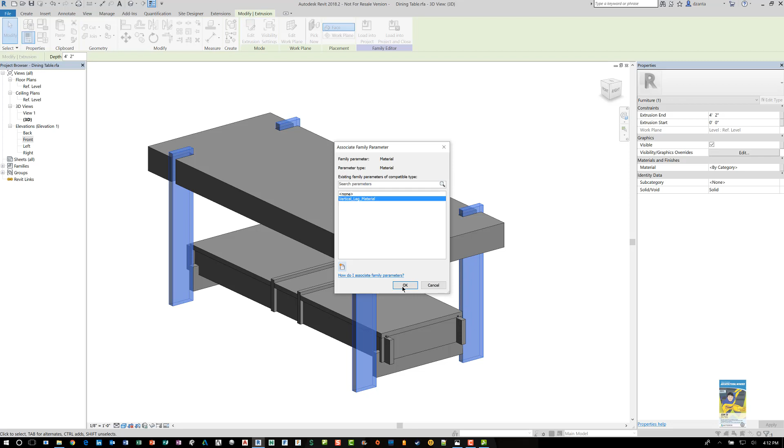Then we can go to the family types window and make it whatever we want. So let's drill inside here. Let's use walnut. And hit OK. And we'll switch this to realistic.

And then we basically rinse and repeat for everything else. So let's take these and the horizontal ones and this top and this top and this top and set them to a different material.

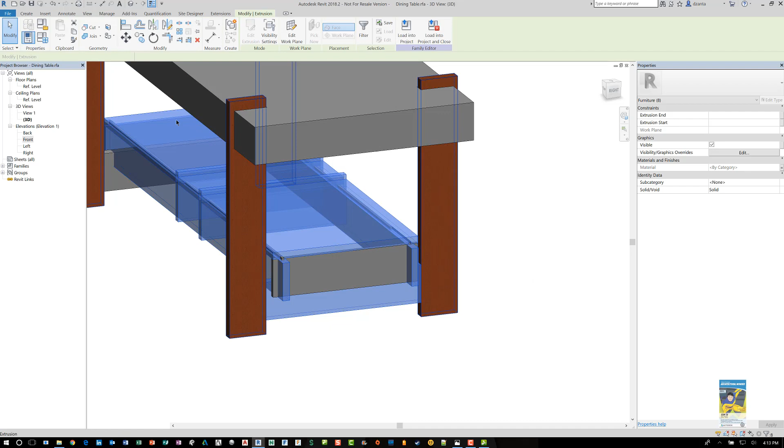So we'll go in here and we'll call this one, say, secondary supports. And let's make that a lighter wood. Say this wood right here is fine.

Oh, it looks like we're missing our dovetail on that side. Looks like it didn't get copied across. Okay, let's take this dovetail and assign it the same material as the leg, the vertical leg support.

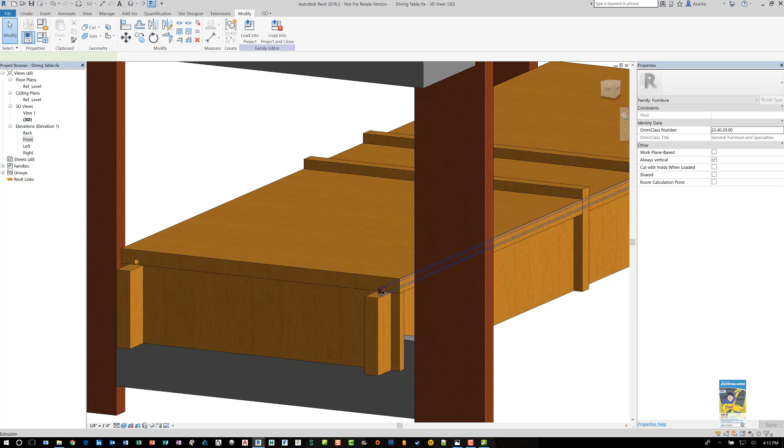Let's head over to the left elevation or right elevation, and then we will mirror this object here. Once we've mirrored it, we can set this to wireframe so it's easier for us to align and lock those edges.

Now we'll go back to the 3D view and we can see that we have the dovetail on that side as well. So there's a couple things left that we want to do. The tabletop, now if we take a look at the picture, the tabletop has two different materials. So I think from the construction standpoint, they built the slabs and pressed them together, so it's two different woods with maybe something in between.

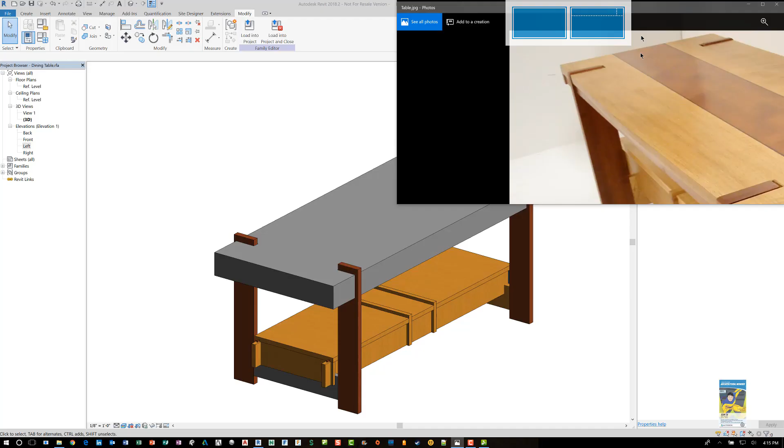In order to do this from a modeling standpoint, we can approach it two different ways. One way is we take this slab we created earlier and remodel it so it has three different objects, one running this length, another in the middle, and another over here, so each one can have its own material definition. Or we can do it as a single slab with one material, maybe the lighter color, and then paint the surface with a different material. It's kind of cheating, I know.

So let's do this the right way. We'll shade this so we can see everything. We'll take a look at this slab we drew for this tabletop, and we're going to edit the extrusion. But before we edit the extrusion, this picture shows that it's divided equally in three.

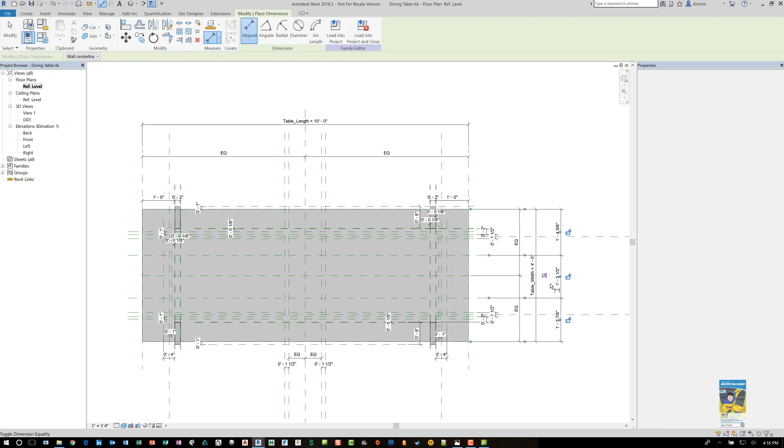So let's create reference planes here and here. Then we want to set up dimensioning so it's dimensioning the reference plane to that plane to that plane to that reference plane, and we'll set this to be equal. There we go, now we have our frame of reference to work with.

So I'm going to select that slab, edit this extrusion, and what I'll do is draw using the pick method, this one here, with the locking feature. And we'll trim this out. Now we'll finish this.

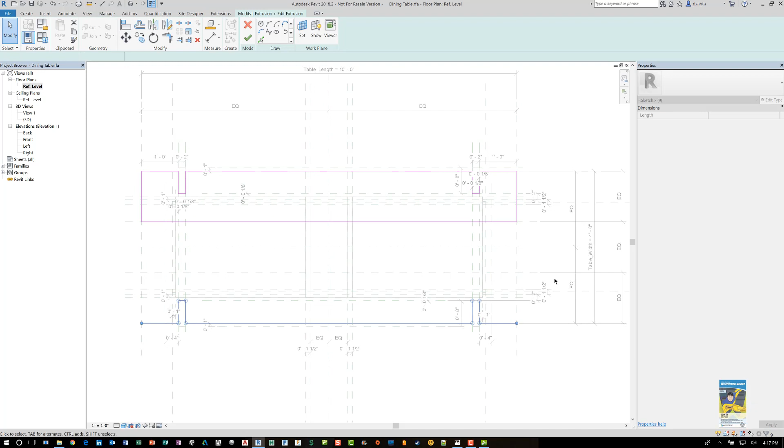Oops, there's a missing line somewhere, let's see. Oh, there's some missing down here, let's clean that up, continue. And let's delete all these, and we'll finish this. So we effectively have one edge done.

Then we'll just take this and mirror it off the center to get the second bottom piece. Now we do need to edit this extrusion so we can align and lock the correct edges.

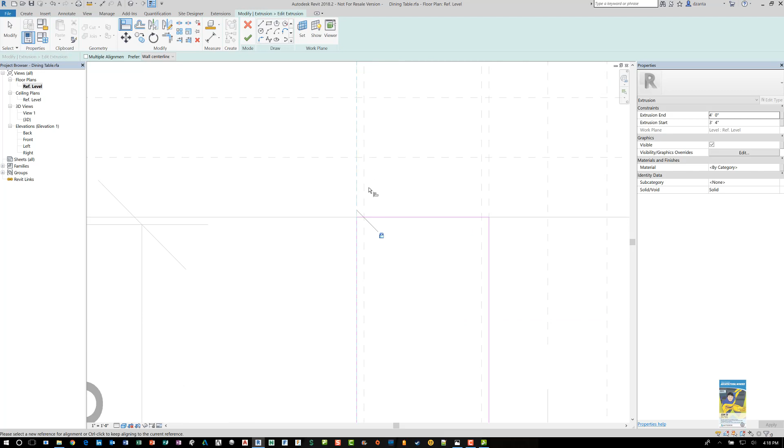This is probably one of the tedious parts of working with families in Revit, so you'll just have to bear with me so we can get it drawn properly. So I want to pick that plane, and same thing on this side. And then we'll finish it. Again, earlier I said with those reference planes, try to draw them, and if you need to move them, do so, so they make a lot more sense when you're clicking and dragging them.

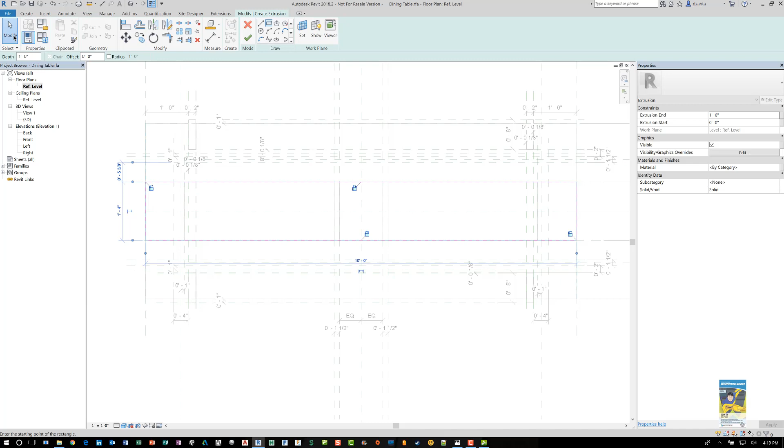Then the last thing we need to do is the slat that's over here. So create an extrusion, rectangular one, and we'll put it here, and lock all four sides. Head over to the front elevation, finish that extrusion, and push and pull that one to the desired location, which is going to be up here.

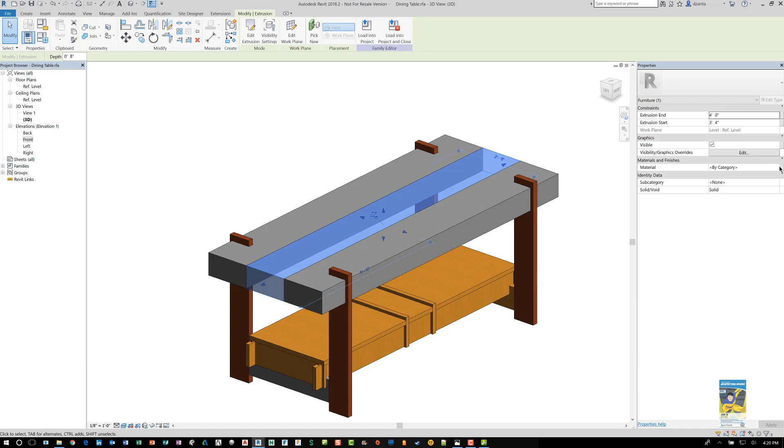Now if we look at this in 3D, we should see three individual slats. Okay, then we can go ahead and make the materials we want for these two. Click inside here and say new, tabletop material 1. And then this one will be tabletop material 2.

And so we can go to the family types window, make the tabletop 1 material the lighter one, which is wood, and then the tabletop 2 material, which is the darker one. And there you go, so we have our table created from that picture.

Oh, I missed one, let's go ahead and pick that one and associate that to the secondary supports. Oh, this one too.

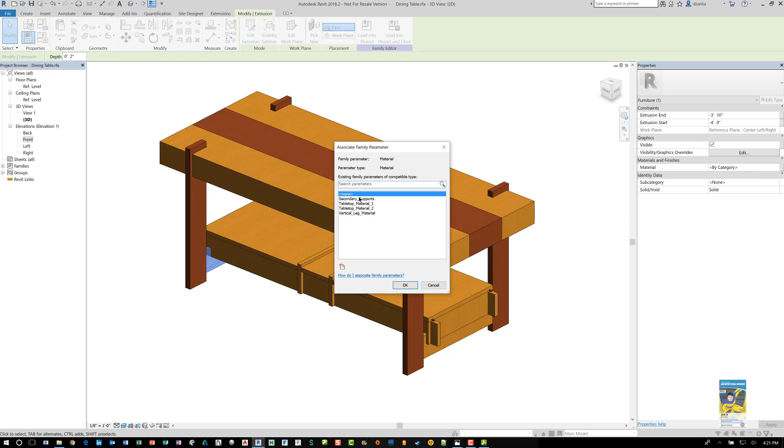So now our table looks complete. Again, as always, save and flex your work.